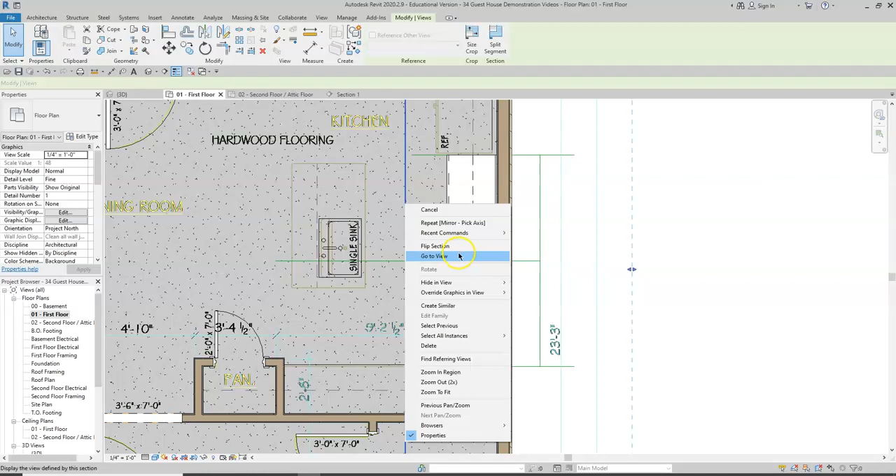Continuing with our kitchen design, we will move to adding the range hood and upper cabinetry. To do this, we will place a microwave above the range, which also doubles as a range hood, and we will place a cabinet above that.

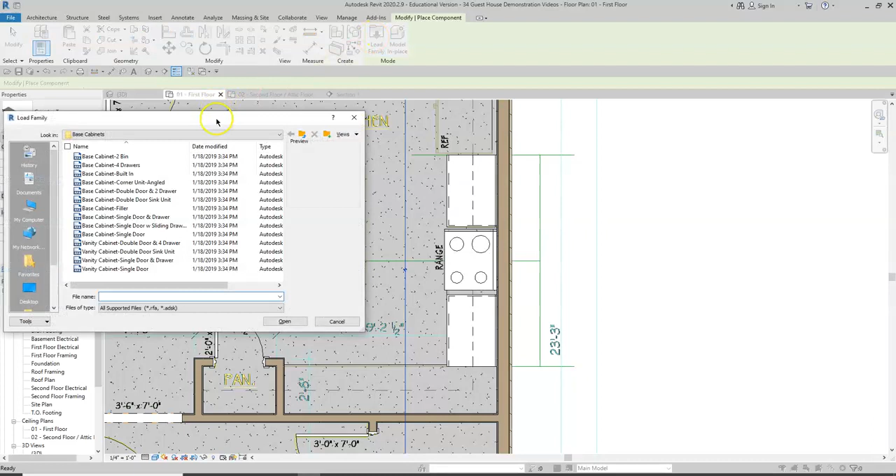To load the range hood, we will click on the component button, and we will load family, and we will import a microwave range hood from the library.

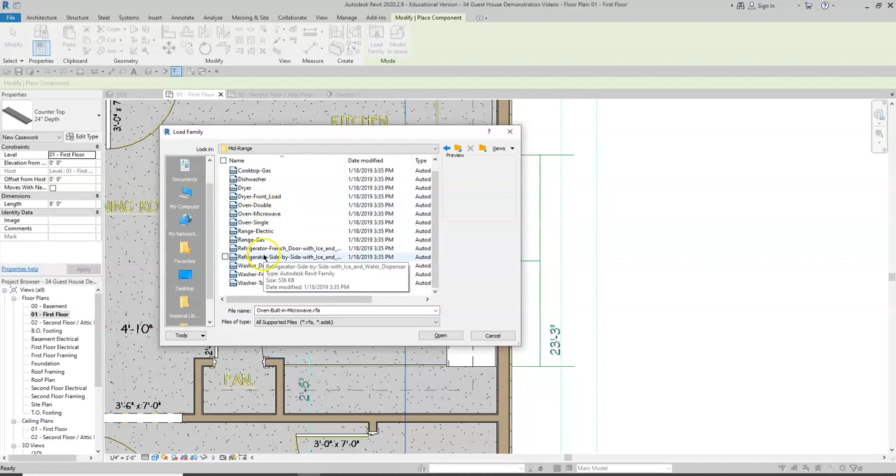We will locate the specialty equipment folder, choose domestic, and in the mid-range folder you will see several different Revit family files, and we will select the oven-microwave component.

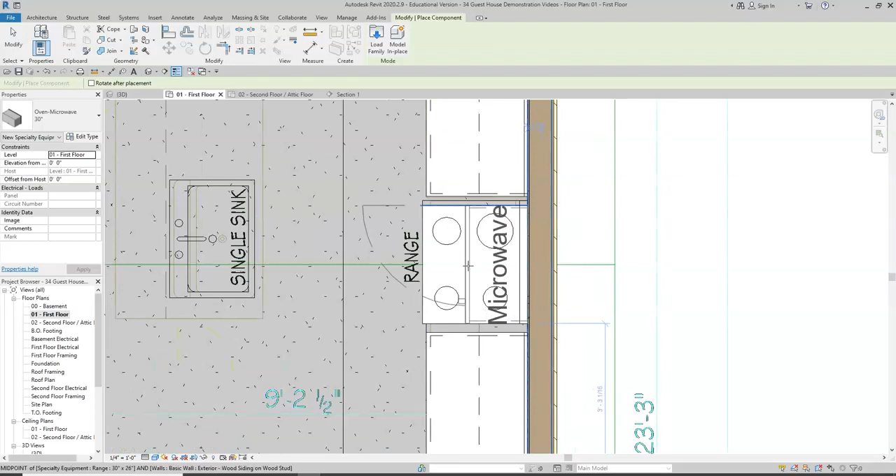Revit will import the component, and we'll rotate in place and align the microwave to be centered over the range.

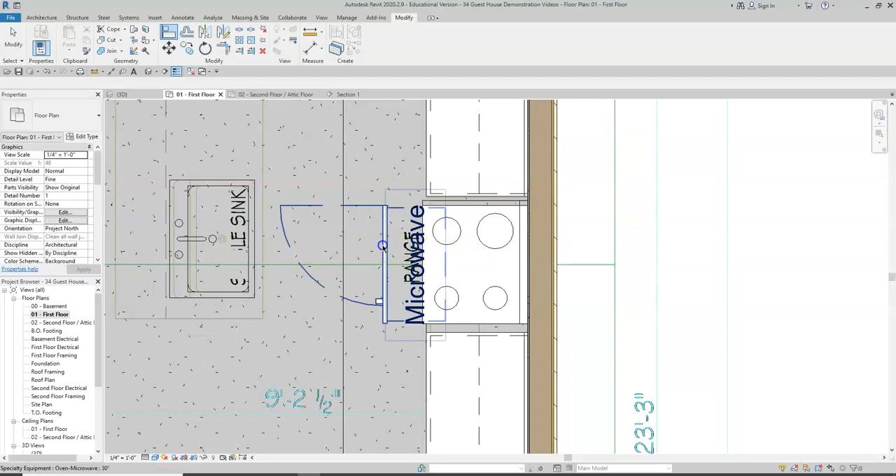By using our align tool, we will align center to center, and the back of the microwave will be aligned to the sheetrock. Now you'll notice the microwave disappears, and this is because it will by default import itself onto level

I believe it would be about 4 foot above. A little more. Actually, right now we could align tool bottom to bottom, and there it is. And then we'll place a cabinet above.

We always want to edit in a 2D view. Normally we would add our upper cabinets on the plan view so that they are inserted at the correct height above the first floor line. But for this instance, we can go ahead and just add a cabinet here.

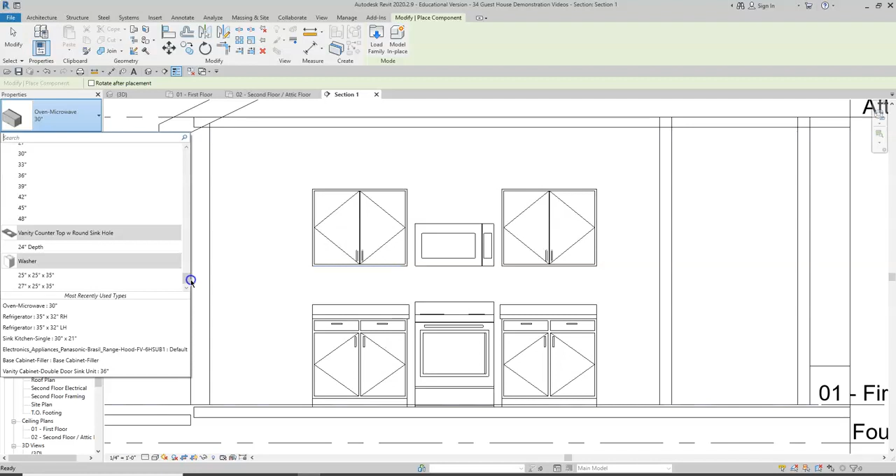We'll go to Component, and we will add the upper wall cabinets. And we saw earlier that the microwave oven was 30 inches, so we can also add a cabinet that's 30.

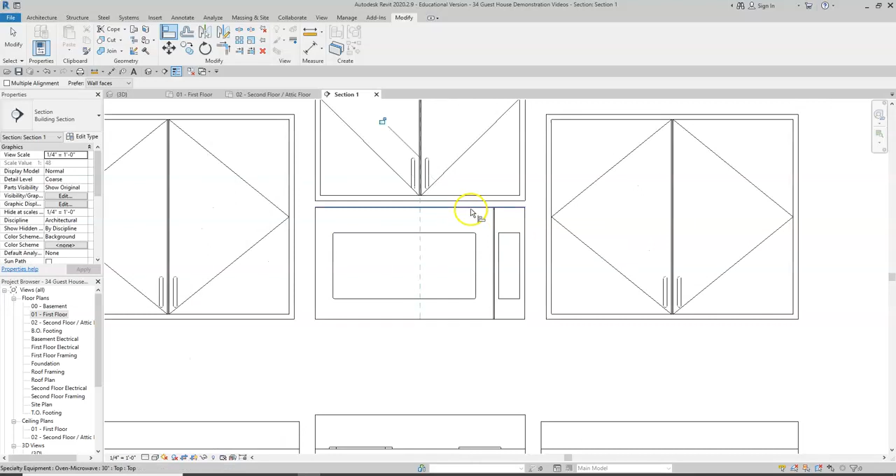And we use the align tool, make sure we're centered and aligned on top. Now notice we have a gap here. We'll see more detail if I turn on the shaded view, which is quite dark actually, so never mind.

We will go back, but you'll see that we have the wall color behind these cabinets. They're not touching, and we would definitely want that to be the case, so we're going to import some upper cabinet filler to fill this gap between the two.

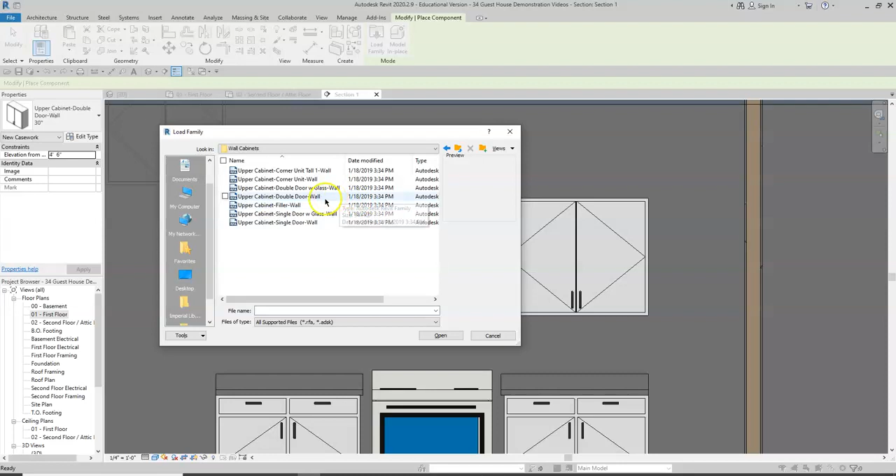So to do this, we will go to Component, and we will load Family, and we will go back to our casework folder and select Wall Cabinets and Cabinet Filler.

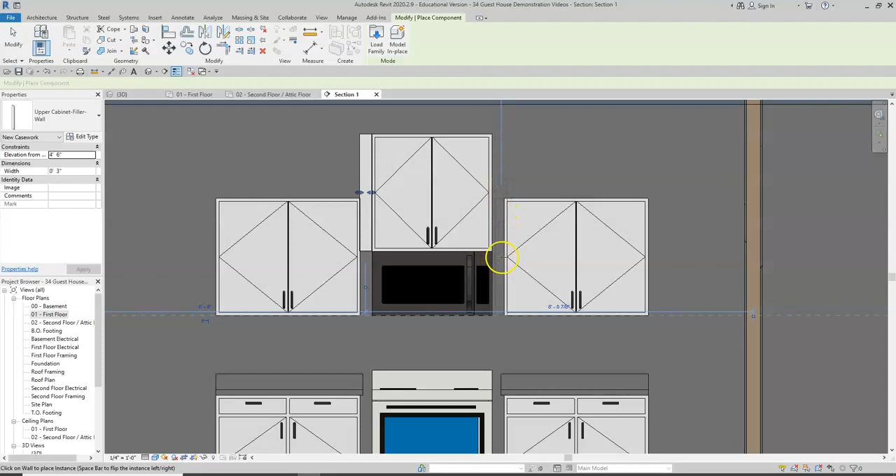Now the filler can be edited both horizontally and vertically. So we would not want to place the cabinet filler here on top of this cabinet because it would be above the lower level cabinets.

So we're going to move this down to match here. So we're going to click 1 and 2. Whoops.

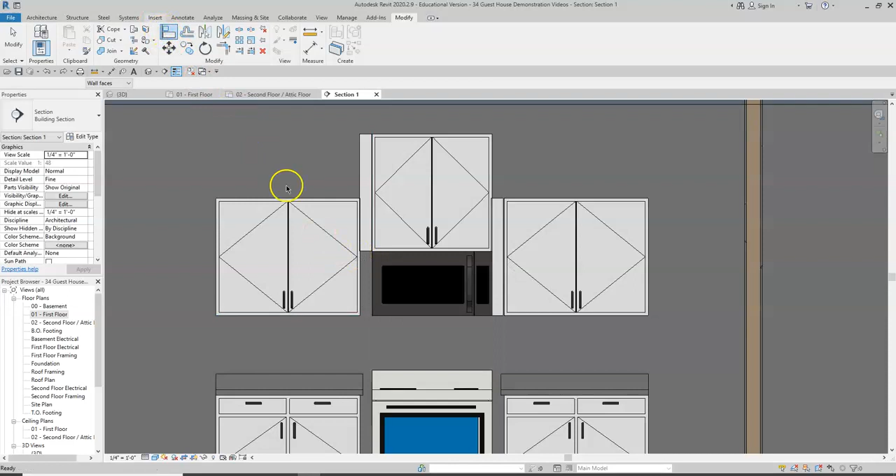Align here and here. And we will align here and here. And then we will also need to make sure that we are aligned vertically. And again, using the align tool is much more precise than just clicking and dragging.

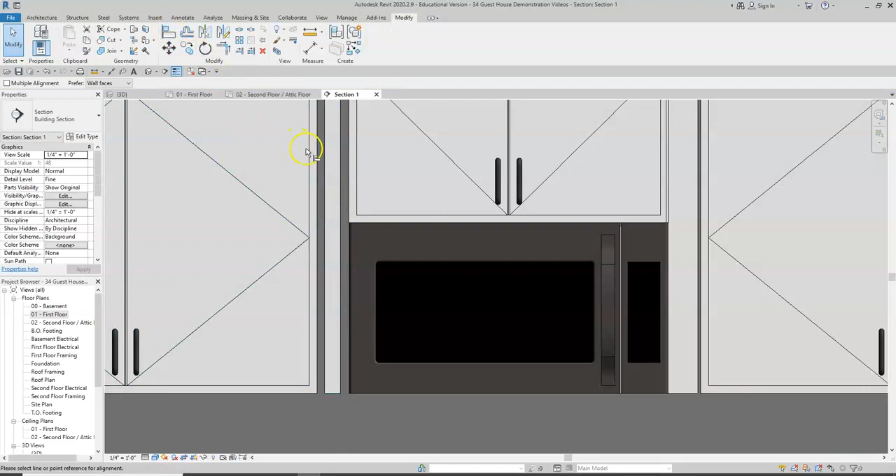So we'll go 1, 1, and 1, 1, and boom, boom, and boom, boom. All right, so there's our filler.

Filler for the bottom is probably necessary given the gap we have, but we'll also want to have somewhat of a gap, just not this much. So we'll do the same thing again.

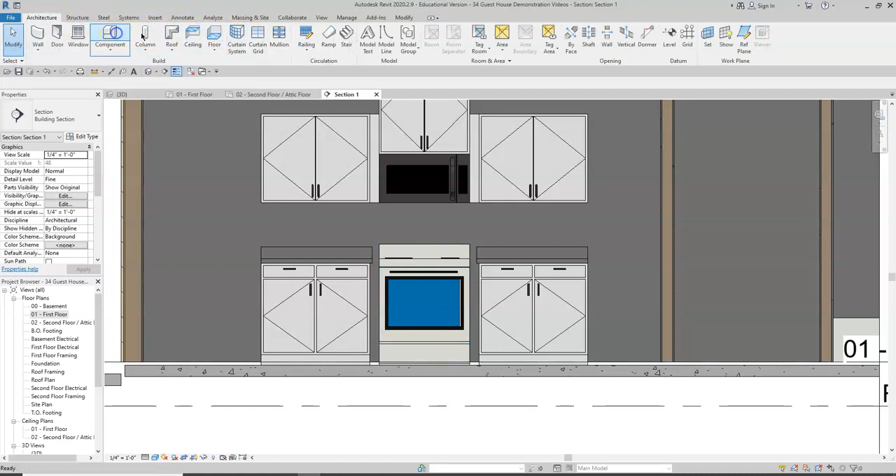We'll load the base cabinet filler, so we'll click on Component and Load Family, and go to the base cabinet folder and click the filler. Now the filler on the base has the toe plate, the toe space at the bottom, which is why we want to use it.

See that I accidentally selected the upper cabinet filler and it's shorter. So there you go. Base cabinet filler.

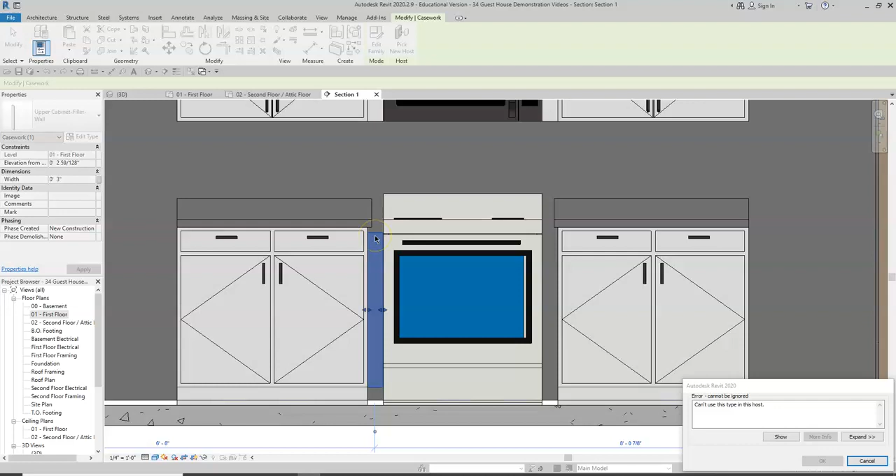Okay, it says we can't use this type in the host. Okay, so we'll need to go to the plan view, which sometimes Revit will give you an error message. You just need to read it and interpret what's going on with it.

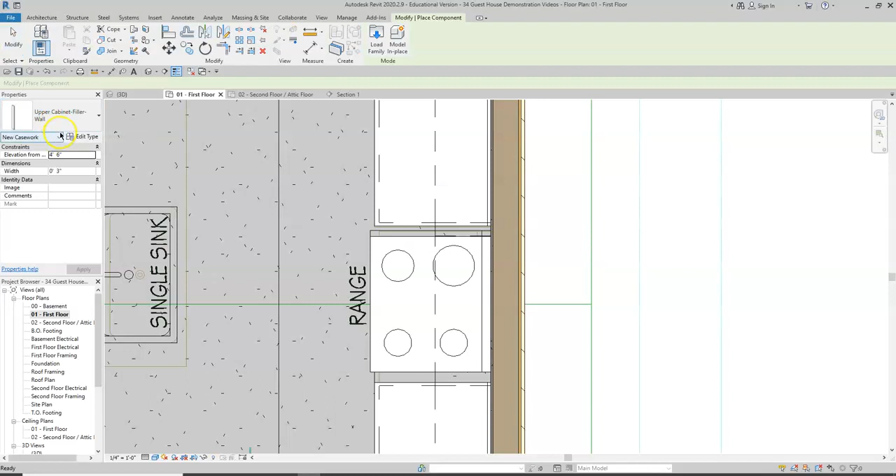So back to first floor and component, and we'll go to base cabinet filler. This was in the recently used.

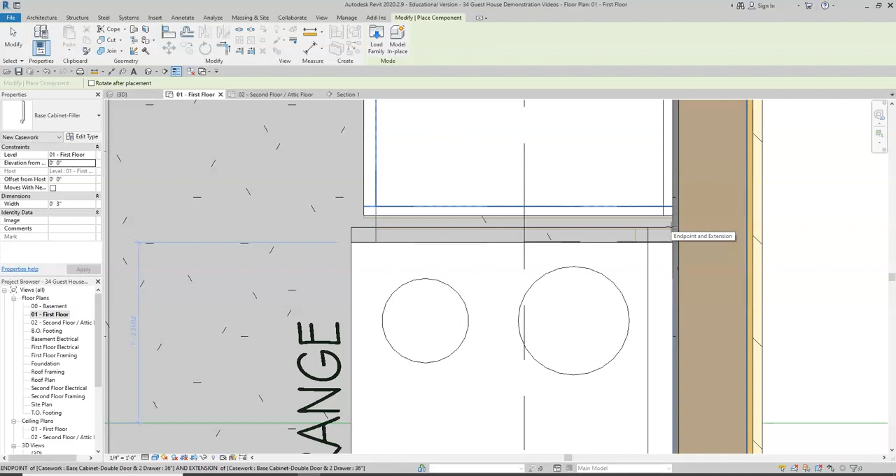Spacebar to rotate. We always want our cursor on the wall side so that it is installed correctly. And then again, we'll click. Actually, we'll edit one and then we'll mirror it.

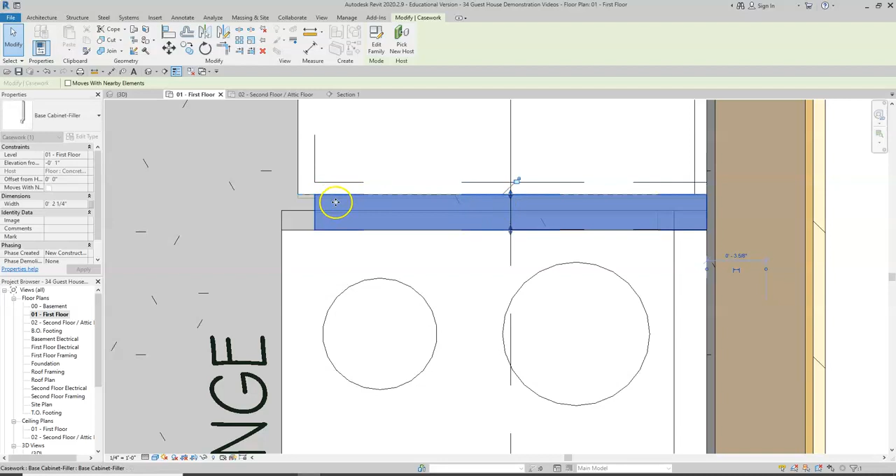If we are intentional about symmetry, then most of these things can only be edited once and then copied. Okay, mirror command, flipped around, and back to section view.

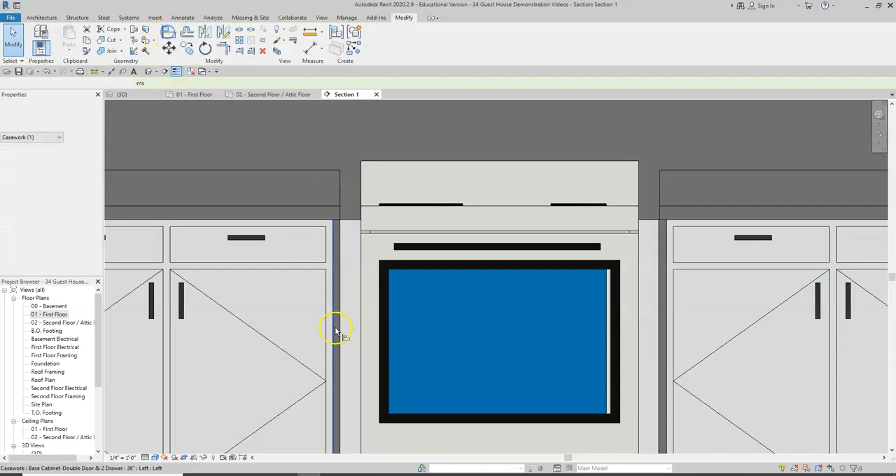And there's my filler. It actually was filled to the line of the countertop, but that's fine. We can align here, not a problem. Boom, boom, and boom, boom. And then we could make our countertop come over as well. Again, that's not as precise as we want, so align there, and there to there.

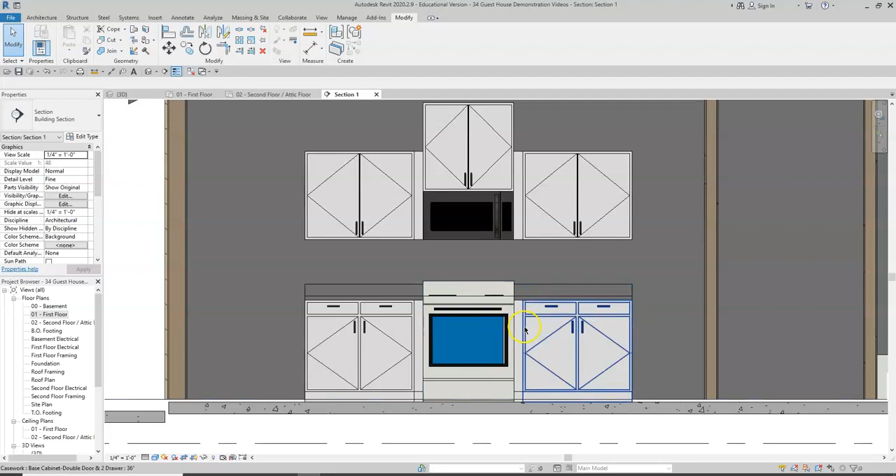So now we have a finished cabinet profile with our appliance. This cabinet filler piece is obviously, you can customize it, you can make it as short as it needs to be. So we didn't leave a gap here, not a problem. In the field, they will lay that out and make sure that it works. Definitely do not want to have the cabinet be touching that close, but the filler piece is fine to use.

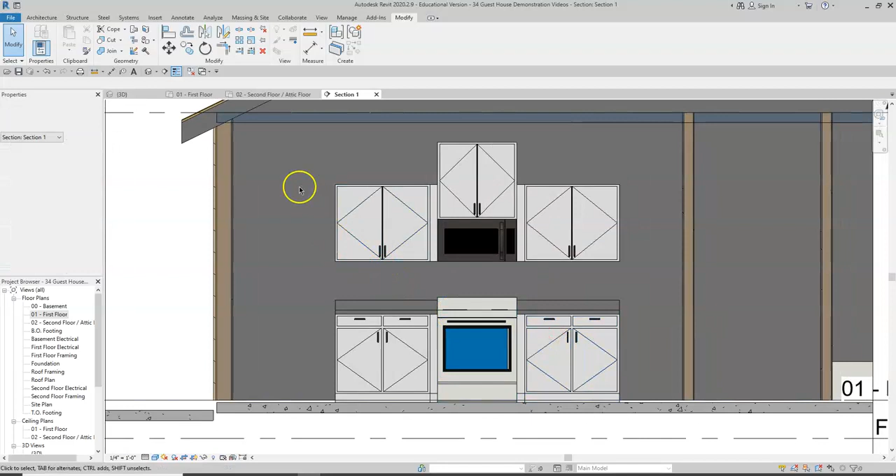Alright, so next we will need to find a refrigerator that we can place in the model. We'll go back to first floor for that. There's some default components in here, which the template gave us. I'm not sure if that's the exact one that's here on the plan right now, but we can check and see. Refrigerator is down in the R's.

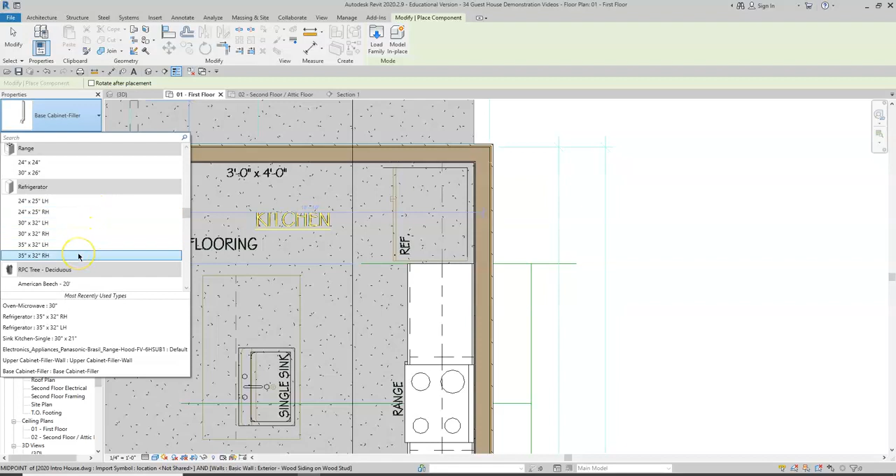And let's just try the biggest. It's looking like that might be different, but I can show you where to find the correct one. So you can put in the default refrigerator. It's not a big deal. I think this one's a little bit bigger. This is a 35-inch wide. It looks like the one in the model is a 30, maybe 7 or 8. And we don't have that in our options, so we can load a different one.

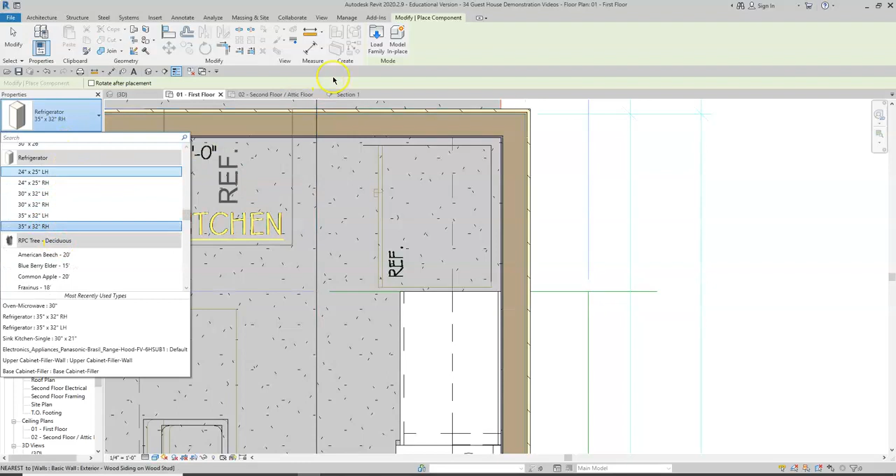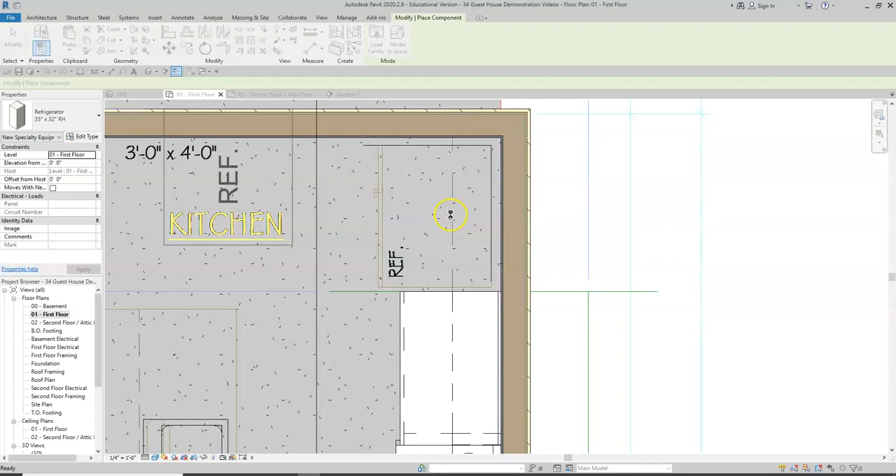We can go back to specialty equipment. And domestic, mid-range. There's a couple refrigerators here, side by side. We can import that, see what happens. Right now, of course, the intent is to learn the software. We don't really need to worry about design element yet.

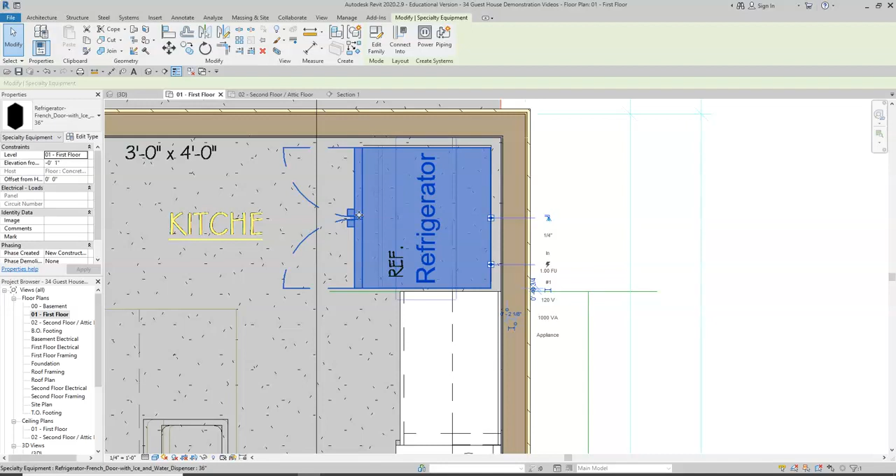So we're going to click this down against the wall. And it looks like this one will fit. It's different from the one that's on the plan, but it will fit in the space, so we can go with that. And if we look back in our section view, you'll see that the refrigerator is in place. Nice current model of refrigerator.

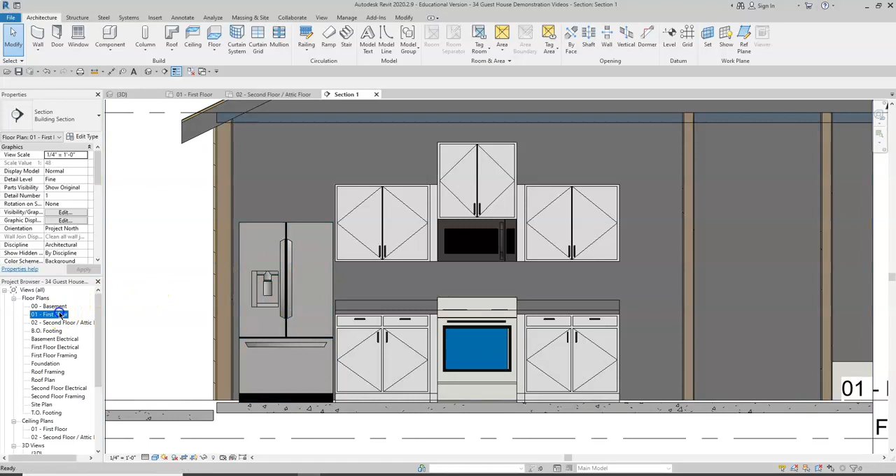And the only thing we're lacking is this set of cabinets on this end here. I'll try to not run out of time like the last video. But we will just place more base cabinets in. We can design freely on this. If you want to have some smaller cabinets, single door, you could throw in some single door.

You could throw in some double door and a combination of the single doors. It's really just up to you. Again, that boxed design for this corner piece would have to be something that we would import that's not in the default. So we're just going to leave this section empty and void, even though we know that it would probably not be void if we were to really build this thing.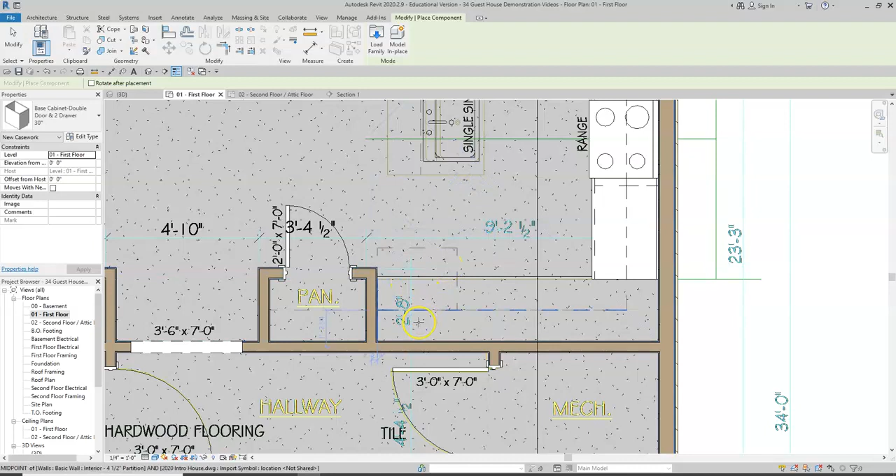Alright, back to base cabinets. Maybe start with the 30 here. Component 30, and cursor on the wall. And we'll put that in, just see what we get. There's a 30. We'll definitely want a single door in the corner for that boxed piece.

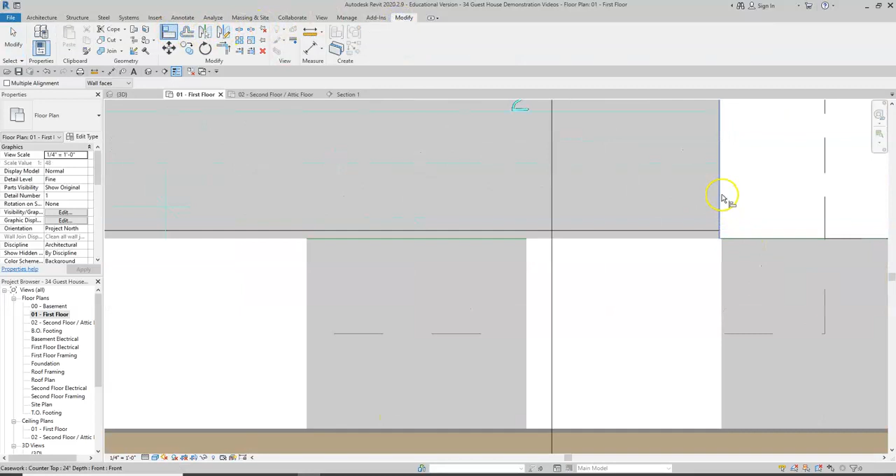So we'll go single, let's say 24. Get a little glitchy here. Component. Base 24. We can click here, and obviously we would again use the align tool. Modify align. We'll align to the cabinet line, not the countertop. And then that'll be a single door that opens, and then it would go back into the corner.

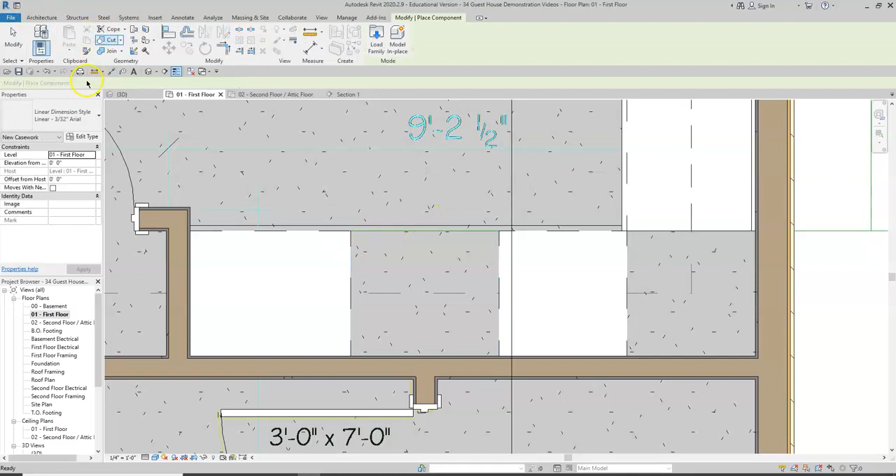Alright, so let's measure what we have here left. We would have to use our dimensioning tool. We're sitting at 2 feet 3. So that's going to be a 24, 5, 6, 7, 27-inch cabinet. So let's see what we have here in the component section. 27 is obviously not an option because we would, of course, need it and not have it. So let me show you how to customize one.

You don't want to customize a cabinet unless it ends in a multiple of 3 numerically. So we'll take this single door. We can edit type. And we'll get into the material and finishes in a different video, but we have the dimensions here. So if we change this number now, we're going to be editing the 24-inch type cabinet, which we don't want to do. So we're going to duplicate, and we're going to name it the 27-inch cabinet.

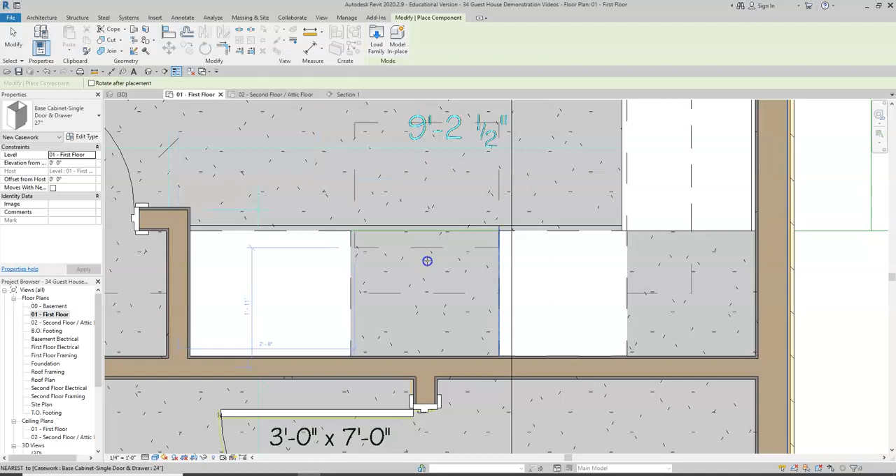And then we're going to click on the width, and we'll change it to 27 inches, which will give me 2 foot 3. And I'll select OK, and then Revit will generate a new size. Just keep in mind that if you make a new size, you might be having a custom cabinet made for your kitchen, which would cost more for your client. Alright, please see the next video for the finishing touches on the kitchen.